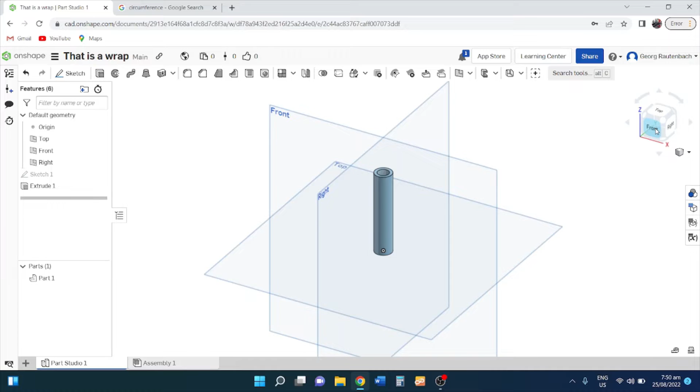So you can just type in circumference, and on the internet there's a circumference calculator. So I've put 5.5 in there, and then it equals 34.55752. So now I go back to my sketch. I like to view it right from the front. So if you go here to the viewer, click on front. Now I'm going to go back to a sketch and I select my front plane as well.

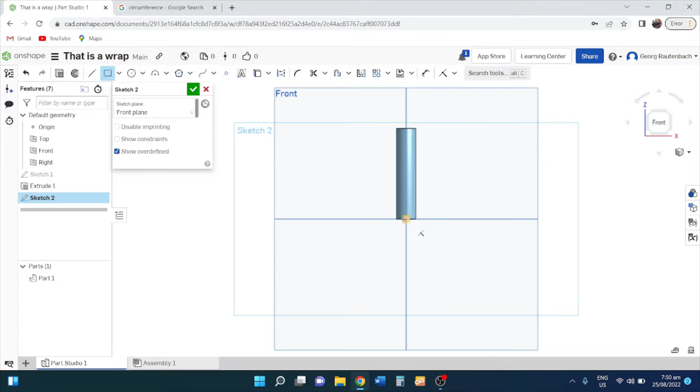Then I'm going to take the rectangle tool, the corner rectangle tool, and I'm putting it right on the bottom there. I see it didn't go right on the bottom, so Control Z. So we'll just do it again. So when you click it keeps it in on that corner. So I've got that there, and I'm going right to the top and I'm pulling it across.

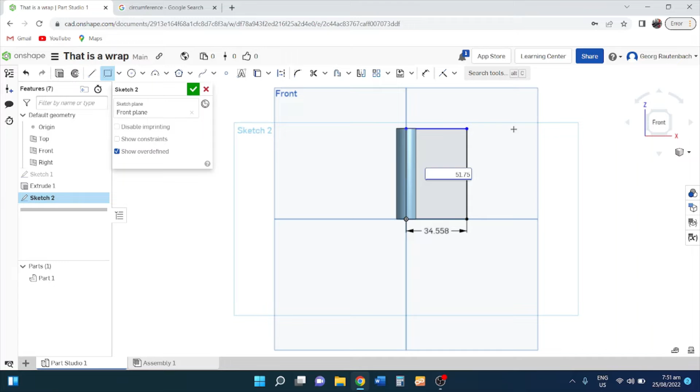And so I want this bottom measurement to be 34.55752. Enter, and then the second one 51.75. The reason why I want the circumference is now this will wrap one time around the cylinder.

And then what you can do is you can grab the line tool plus the construction line tool, and then I can draw. If you hover over it, see if that orange block appears. That's the center of my block, so I can draw a center line there. This is just guidelines. Press escape and then I can do it again. Line tool, construction line, and I hover over this line until I get the block. Then I draw lines across. So you can do more lines if you want to.

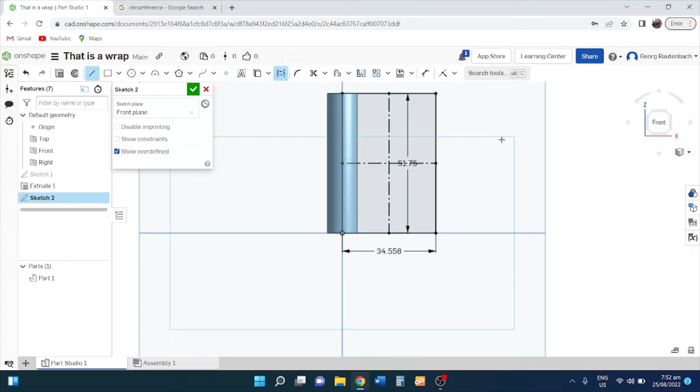I'll just show you. If you click on this one and click on that line, I can put it anywhere for now. And then press escape, go to this, get the center tool, so midpoint. You can look for it here as well if you search for tools, midpoint. And if I click on that point and those 2 points, it will automatically move that to the midpoint.

Let's do one more. So I've got this and I'm putting it anywhere on that line, straight down. Then I'm going to press escape, my midpoint tool. So I click on this, that and that, and it will automatically move that line to the middle of those 2 points. And you can do lines across here as well for reference.

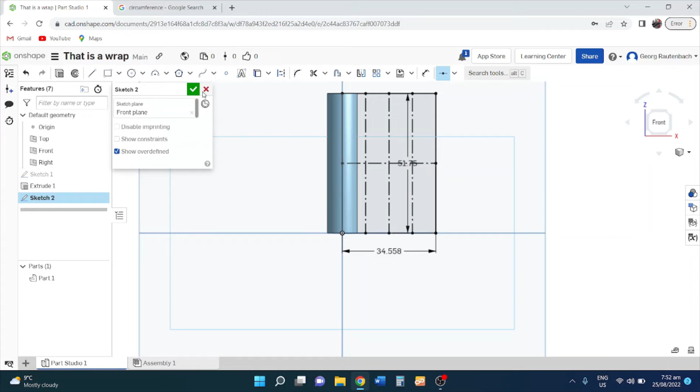So now I just have to sketch. I like to use the spline tool because the spline tool kind of stays live. So if I draw any random shape here and press escape and then choose the spline tool again, and we'll do another one there. So you can choose what you want to, it's according to your design. So you can practice this, copy this one exactly for practice, and then do your own design. And then we'll do that one, and a last one.

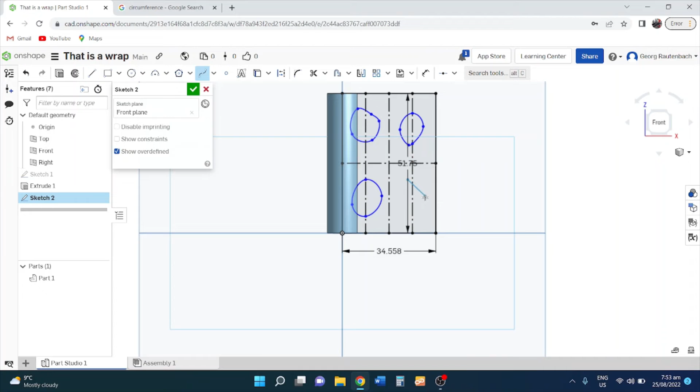Every time you click, it gives a point that will be movable afterwards. So I'll press escape. I'll just show you. You can move those points. So see, you can change your shape a little bit like that, and you can change this one.

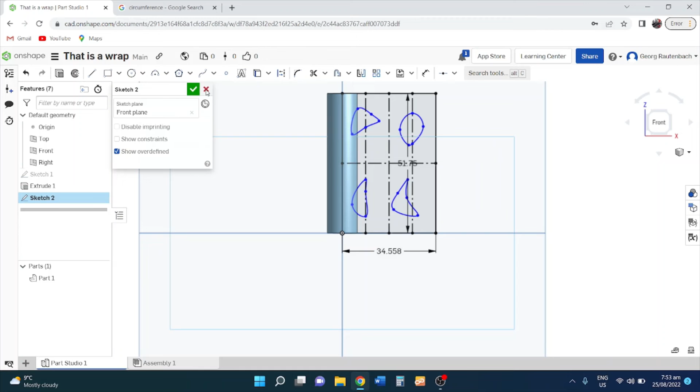So now when you want to use the wrap tool, you have to go out of the sketch. So I'm going to click the green tick, and then I'm going to click on search, and then I'll just search for the wrap tool. It's easy, and then there's the wrap tool. Now we don't want the surface wrap, we want the solid wrap. And then the first block, rather make this 1.5 or 2 mils. You don't want it to stick out too much of your pen.

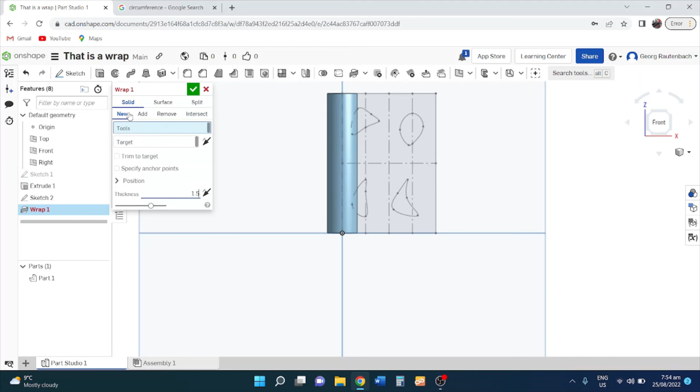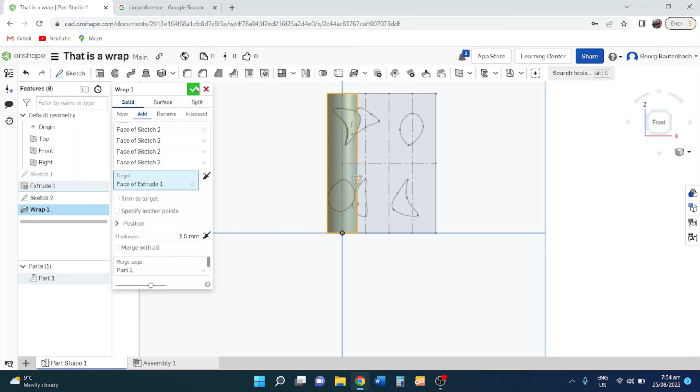Then we're gonna have a solid, and then what we want to wrap is those. So I'll click on all those that I want to wrap. So just let them be highlighted. Then my target is my circle, so I want to wrap around the circle. So if I click on target here and I go on the circle, that's where I want to wrap it about, and you can see it wrapped it around. And if you give it a green tick there, you can have a look at it and see you've got the pattern wrapped around your pen now.

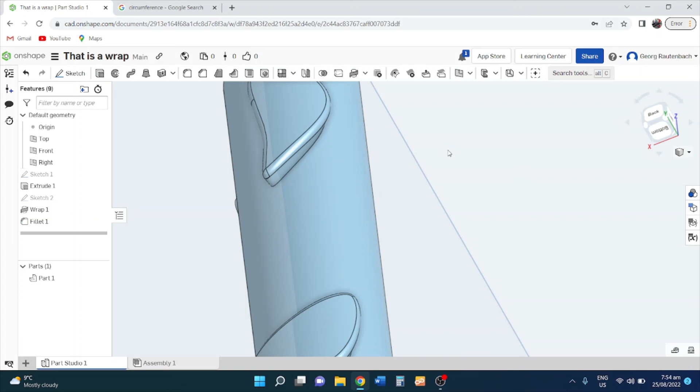Then just for comfort, see this fillet tool, 0.5 mils will be good. And if I click on each one of these surfaces, it will fillet the ends around, so you can have a look there, see it's a little bit round. That's just for comfort of holding it. So that's basically using the wrap tool, and this is a wrap.